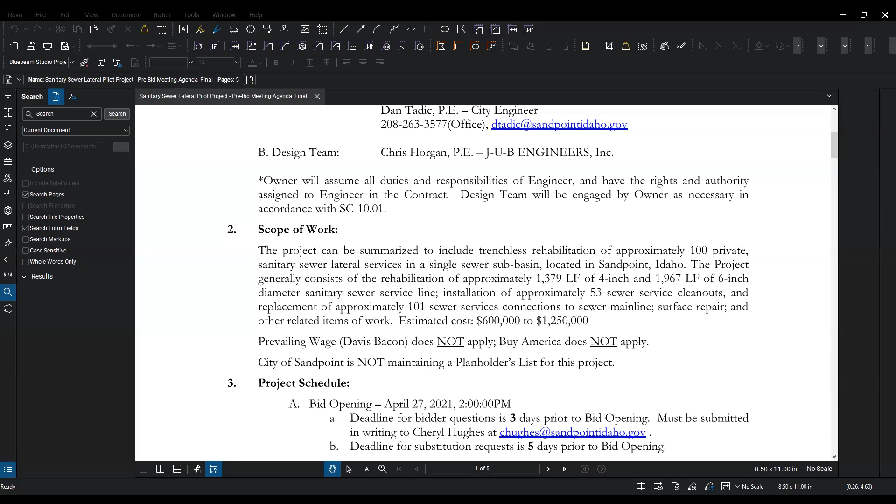Okay, so the project can be summarized to include trenchless rehab of approximately 100 private laterals. And the project is located in Sandpoint, Idaho. Generally, the rehab is approximately 1,379 linear feet of 4-inch and 1,967 linear feet of 6-inch diameter sanitary sewer lateral line, installation of approximately 53 sewer service cleanouts, replacement of approximately 101 sewer service connections to the sewer main line, surface repair, and other items of work.

Estimated cost, $600,000 to $1.25 million. Prevailing wages do not apply. Buy America does not apply. City of Sandpoint is not maintaining a planholders list for this project. Dan, anything to add on scope of work? We'll dive in a little more later. No, I think you covered it well there.

Okay, we'll take a look at schedule. Bid opening is scheduled April 27th, 2 p.m. Deadline for bidder questions is 3 days prior. These must be submitted in writing to Cheryl. Her contact information is listed. Her email is chughes@sandpointidaho.gov. Deadline for substitution requests is 5 days prior to bid opening.

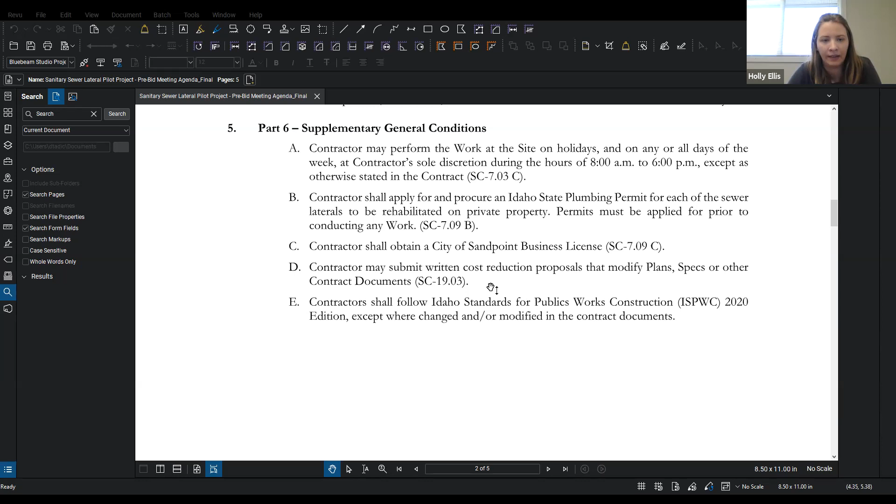This next piece, contractor shall obtain a City of Sandpoint business license. Contractor may submit written cost reduction proposals that modify plans, specifications, or other contract documents. And the last piece to highlight here is contractors shall follow the Idaho Standards for Public Works Construction. It's the ISPWC 2020 edition, except where changed and or modified in the contract. So just a few pieces there to highlight.

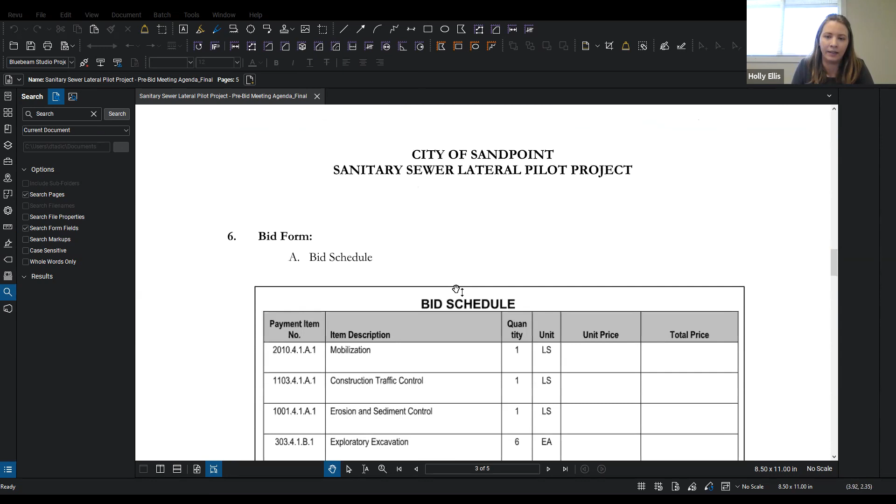This next piece is our bid form, and I'll hand it over to you, Chris, to kind of talk through this portion. Okay, great. Can you hear me okay? Yeah, okay. I see thumbs up.

Perfect. Yeah, so like Holly said, I'll take a quick spin through the bid schedule here, and then we can talk about some of this in a little more detail when we get into part 7 in the next section. So bid schedule, obviously, these are the unit price items that we're planning to use as the basis of payment for this project. So if it's not here, it's incidental to the items listed here. So just keep that in mind looking through this.

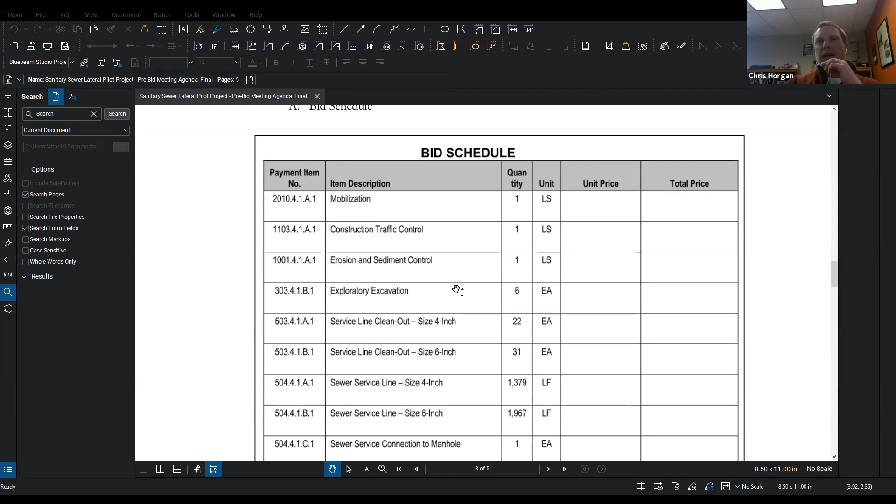The first 3, we've got our standard lump sum items: mobilization, traffic control, sediment control. Exploratory excavation per each. There are very specific instances defined in the contract about when that bid item applies. I'll touch on that here in just a second. But take a look at those so you understand when those happen. Get down into our cleanouts and our service line. As Holly mentioned, that's really the crux of the project here, getting those replaced.

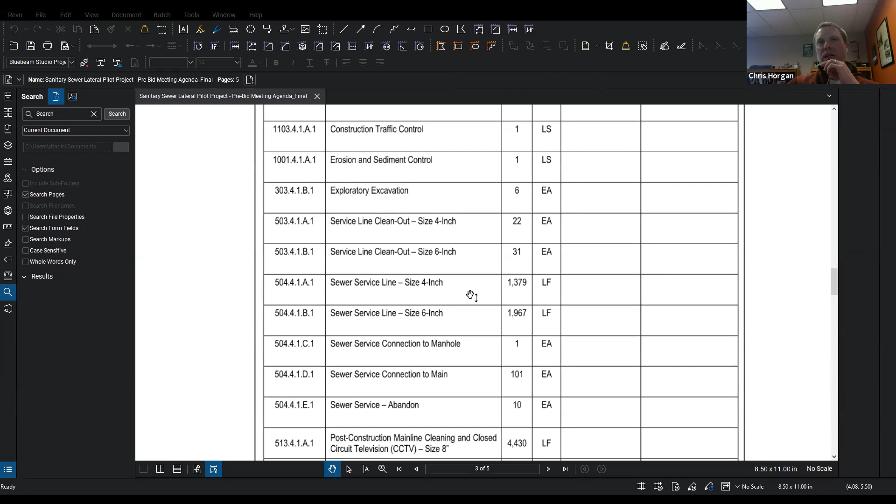Cleanouts are per each. Sewer services are linear foot, and that linear foot is based on a defined length in part 8 of the contract documents. The lateral replacement schedule has a defined length for each service line. And that is the basis of payment. And I guess I can mention it here. We have a few of these laterals that aren't getting a full replacement. There's a couple that just have some small segments that need to be replaced. So the basis of payment for that lateral is just the piece that needs to be replaced.

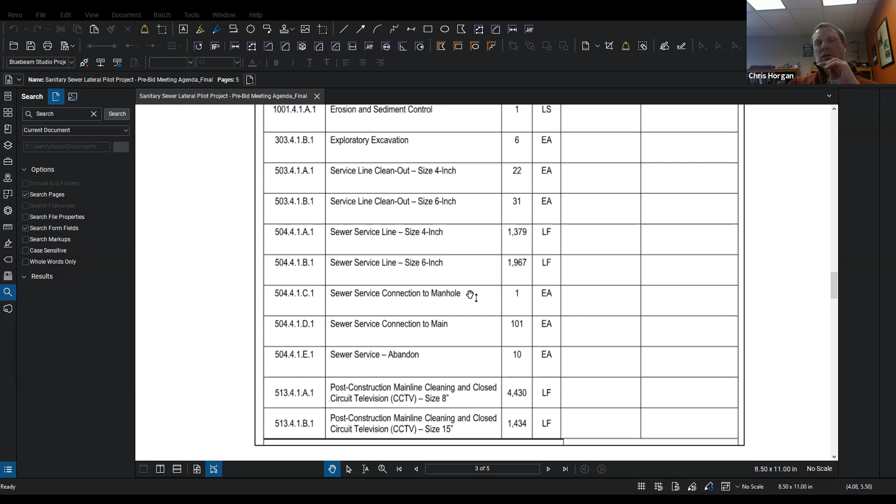So if your selected method of construction requires that you put in a little more on either side to complete that repair, that additional piece is incidental. So again, take a look at part 8 to see what the basis of payment is for each lateral. Connections to manhole and main line, that's where we're getting the lateral connected to the sewer main. Those are per each. We have a few services we're capping and abandoning per each. And then finally, just some post-construction main line cleaning and CCTV.

So again, and I'll mention it as we go through part 7, but some things that are not in that bid schedule: surface repair, excavation, backfill, those sorts of things. Those are all incidental to the items that are in there. All right, jumping into part 7 here. So special provisions, this is where we get into the technical specs. I'll just try and point out a few paragraphs that we think are important. I'm sure everyone's going to read the entire thing, but if you don't, maybe check these paragraphs here.

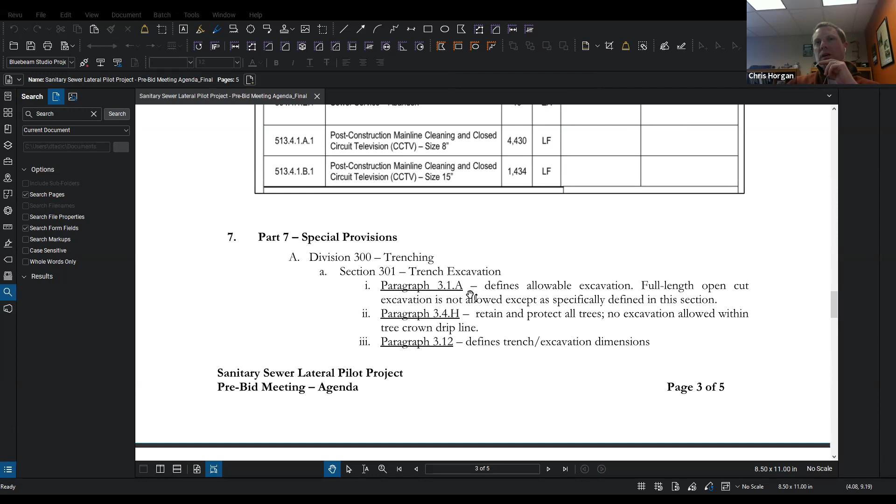So trenching, section 301, I've got a few things called out here, some different paragraphs, 3.1A, 3.4H, and 3.12. Those all define the allowable excavation limits. So in this project, a full-length open cut for the service line replacement is not allowed except as specifically defined in this section.

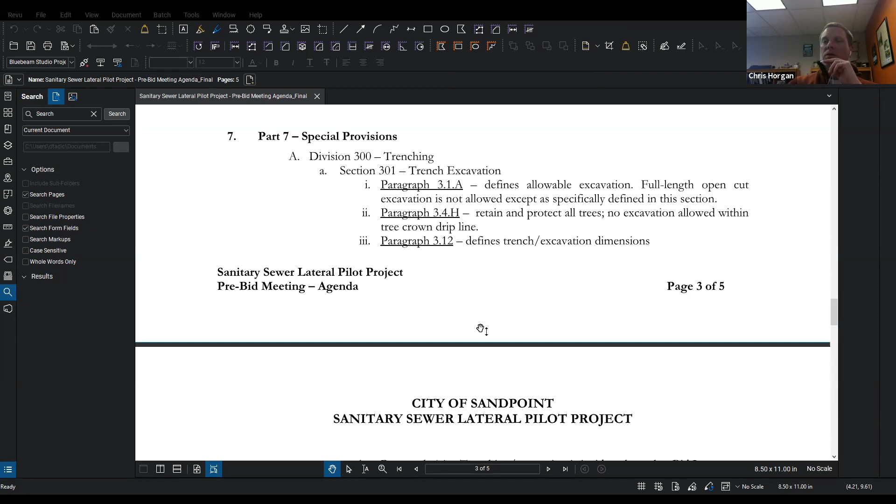So there are some very specific instances where that full-length open cut is okay. Otherwise, we have limited the amount of excavation that is allowed for this project. So please take a look at those instances where it is and is not allowed, and then what the allowable excavation limits are. And then we're trying to retain and protect all the trees here, so we want to eliminate excavation within the drip line.

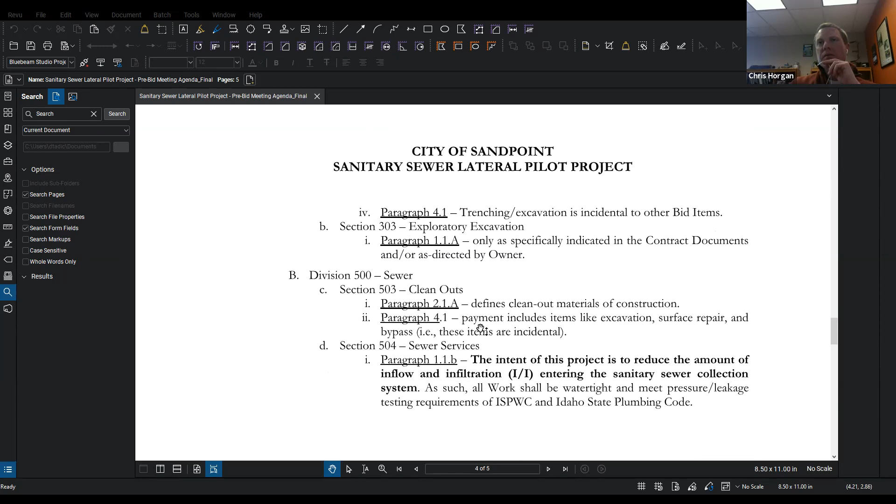As I mentioned above, yeah, you can keep scrolling there, Dan. Paragraph 4.1 talks about payment. Trenching is incidental to those other bid items, whether it be cleanouts or sewer service line. Section 303, exploratory excavation. Again, some very specific instances where that is called for and paid under the contract documents. Otherwise, any sort of exploratory work that you want to do is incidental. So take a look at that paragraph to see when that's allowed and when we expect to pay for it.

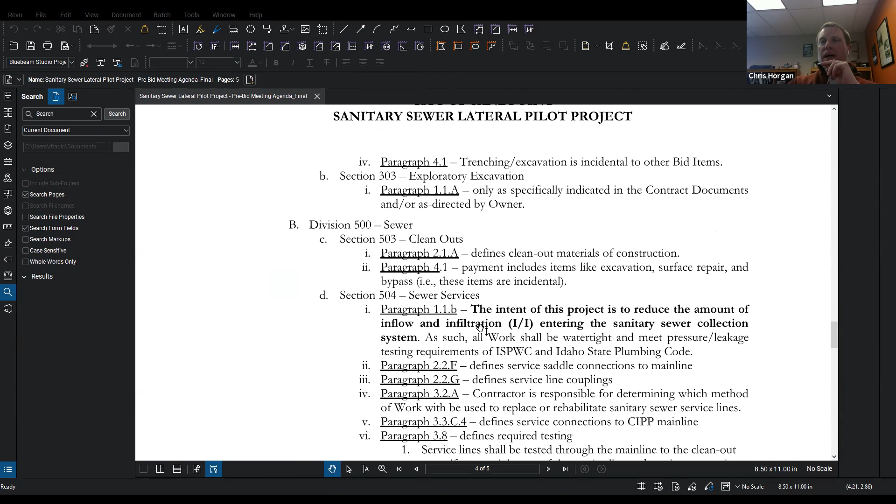So Division 500 sewer. So that's kind of what we're up to here. Obviously, Section 503 cleanouts, paragraph 21A talks about the materials of construction for cleanouts, and then 4.1 talks about payment. Again, things like excavation, surface repair, any sort of bypass, those are all included in the pay item for the cleanout. In other words, they're incidental to that item. We're not making separate payment there.

Section 504, sewer services. I put in bold here, paragraph 1.1. So the intent here, we're replacing these laterals and we are trying to get I&I, inflow and infiltration, out of the city system. So that is key to this project. And so everything we're looking at, we want to make sure that it's watertight and that it meets pressure and leakage testing as defined in ISPWC and Idaho State Plumbing Code. So just keep that in mind. That really is our goal here, is to keep that clean water out of the city system.

Moving along, paragraph 2.2, F and G, those define the couplings that are allowed. So we've got some specific service line to main line connections, and then also some lateral to lateral couplings that we've allowed here, again, to try to meet that intent of being watertight. So please take a look at that list of those allowable fittings. 3.2A, so again, we've limited some of the excavation here, but again, it's up to the contractor to decide which method you'd like to use to do this work. So there are various ways in here, but that's up to the contractor.

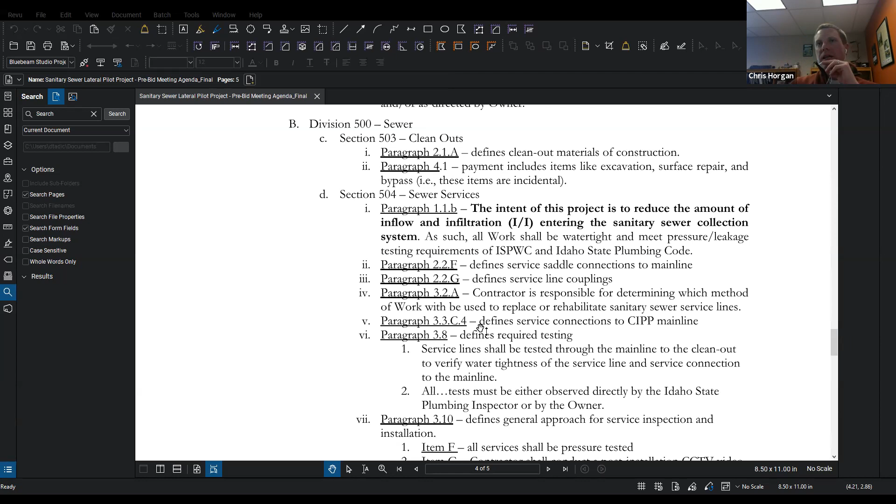3.3C4, connections to the CIPP main line. So many of the main lines in this neighborhood, in this basin, have been rehabilitated with CIPP. So some of these service connections are going to be to that cured in place. We want to make sure we get a nice tight seal on that liner. So this paragraph talks about what that looks like.

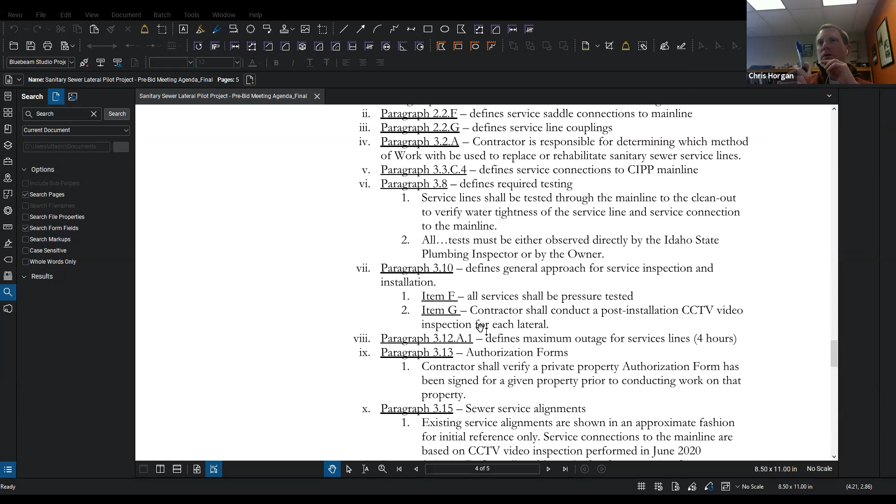Paragraph 3.8 talks about testing. Again, going back to our goal of being watertight here. So we want to test the service lines through the main line to the cleanout to verify water tightness. So again, want to keep the water out. And just a note that through the main line, we also want to make sure we are testing that main to lateral connection. In many instances, that is the weak point in these laterals. And so we want to make sure we get a good seal there. I think Dan mentioned it earlier, but the tests need to either be observed directly by plumbing inspector or owner. And I guess plumbing inspector, that would be specific to the work on private property.

Let's see here, where am I at? 310, general approach for service inspection and installation. So it kind of runs through the steps that we would generally expect folks to follow as you go about replacing these service lines. Point out F and G there, pressure testing, again, trying to be watertight. And then item G, we need a post-installation CCTV video of each lateral. So again, we're getting mainline video, and then we're going to get lateral video as well.

312A1, maximum outage for service lines, 4 hours is the limit there. As Holly and Dan mentioned, this is a residential neighborhood, so we certainly don't want to knock folks out for days at a time, and certainly want to be sensitive to when they're going to be using their water and sewer. 313 authorization form. So any work on private property needs to have an authorization form. The city has copies of those and they can provide them. So no work on private property without that authorization form.

315, sewer service alignments. So we've shown them in part 8 in the drawings, kind of in an approximate fashion. We generally know where they connect to the main line, and we've shown them kind of perpendicular from there. That's just kind of a general location to give you a sense of where they might be. That's based on CCTV inspection from June of 2020. But again, as part of this project, you'll need to verify that alignment as part of the replacement.

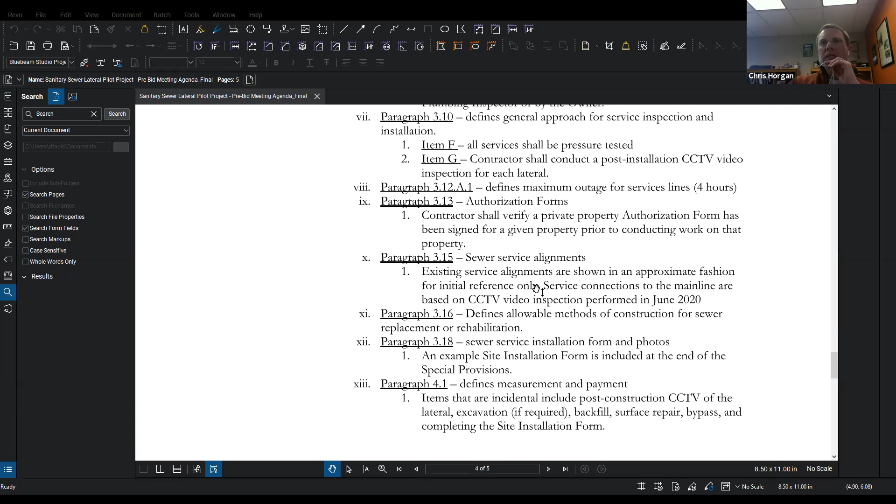316, allowable methods of construction. So again, this just talks about whether it's replacement or rehab, things like pipe bursting or cured in place lining, that sort of thing. Paragraph 318, sewer service installation form. So there's an example of this form at the end of the special provisions. And really this is a way to document the work that is done at each service.

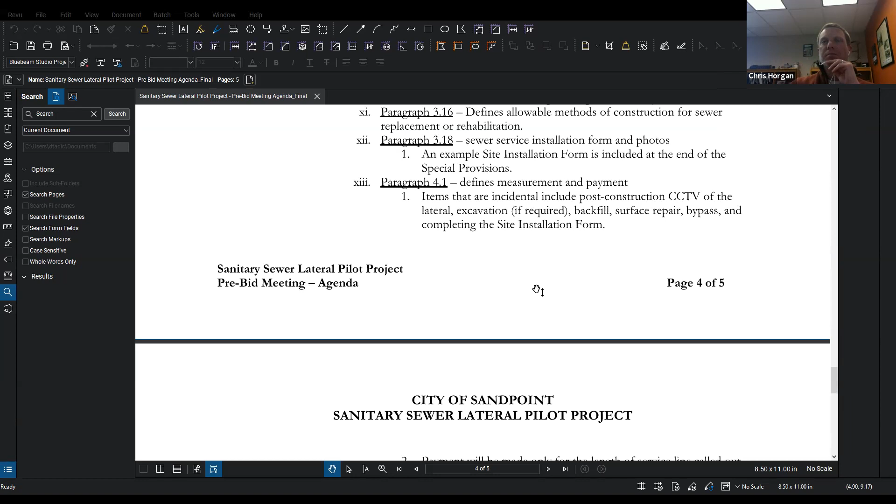So the form has a spot to fill in the address and the footage of the service along the main line, what the service size is, what kind of work was done. Was it pipe burst? Was it rehab with CIPP? That sort of thing. And those are required to be turned in for payment. So if there's no service installation form, there's no payment for a lateral. So we'll get those filled out there.

Let's see, measurement and payment there in section 504. Again, we're paying for cleanouts, we're paying for service lines, everything else incidental there. Things like backfill, surface repair, bypass, all that stuff. And then here, item 2, again, as I mentioned before, look at part 8 that defines the payment limit for a particular service and what the footage is. And then the sum of those footages in part 8 is what makes up the value in the bid schedule.

307, oh, I got that one a little out of order. Sorry about that. Is street cuts and surface repairs, talks about what we expect in terms of pavement. Miscellaneous surface repair, again, that is incidental to the other bid items, whether it's sewer services, cleanouts, whatnot. 509, 510, talk about cured in place pipe and pipe bursting, what we expect there in terms of material and installation. 512 talks about bypass. Here, again, we're working mostly with laterals, but obviously some interaction with the main lines. So needing to plan for that is necessary.

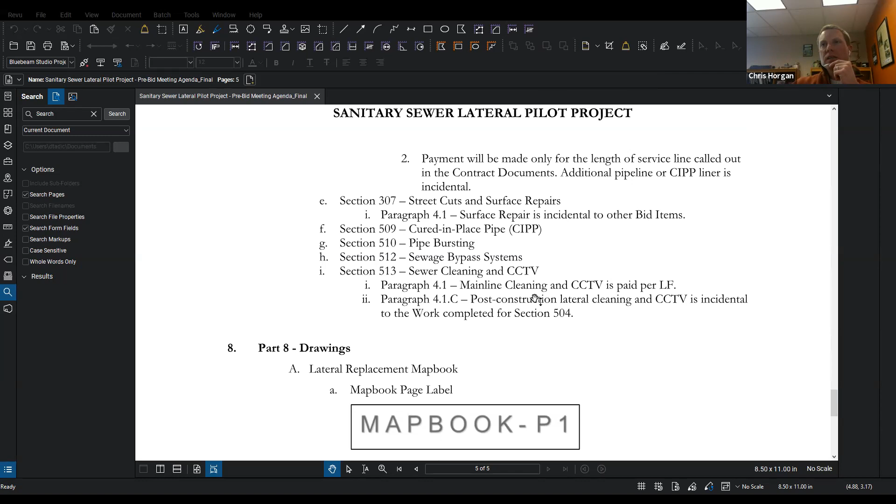And then sewer cleaning and CCTV talks about kind of what we want to see there in terms of that cleaning and CCTV after work is completed. And a note on that CCTV payment: the main line is paid in the bid schedule, but the actual video of the lateral is incidental to the lateral item.

Whew, all right, part 8, drawings. So kind of 3 main components here. You've got the lateral replacement map book. So that gives you a visual sense of where the sewer main lines are, where the laterals are, kind of what the distance is along the main. Each map book has a page number, so P1 through 14 or 15, I don't remember off the top of my head. And then that corresponds with the next section, which is the lateral replacement schedule.

So this replacement schedule is where we define distances along the main line, what size the service is, what kind of work we expect to be done. And again, this is where we define that length that's the basis of payment for each service. And at the top of each of those replacement schedule pages, you'll have a pipe number and a map number. So that map number corresponds to the page on the lateral replacement map book.

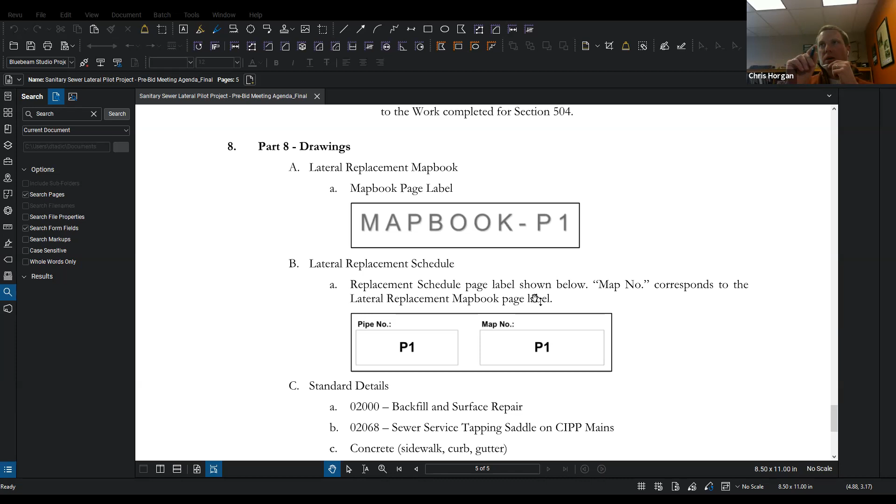So in my example here, I've got map book page P1 and I've got map number P1, which will show pipe P1. So take a look at those. That'll sort of help you keep track of where you're at as you flip back and forth between the 2 sections. And then lastly, just some standard details at the very end here. So backfill and surface repair.

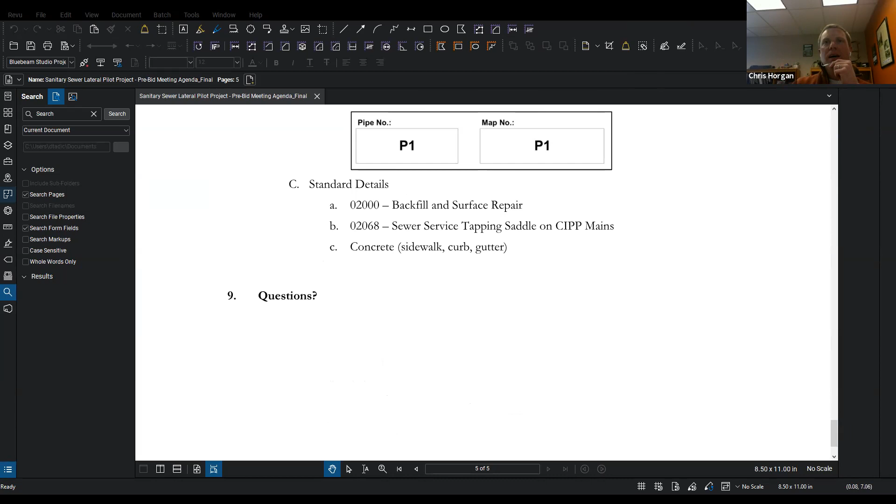We've got a detail for a sewer service tapping saddle on CIPP mains. Again, as I mentioned, we've got some of that CIPP here, so we want to make sure we have a very tight seal on that. And then some city standard details for concrete, sidewalk, curb, gutter, that sort of thing. So there you go, parts 7 and 8, bit of a whirlwind, but I think those are the parts we think are important.

Thanks, Chris. Yeah. At this point, we'll open it up to any questions.

Yes, this bid has 3 different methods of trenchless. How does that work? Will it be all pipe bursting, all CIPP, depending on who has the lowest bid? We expect that it would be up to the contractor. Likely they would have one method. Okay, so you'll pick one method. Well, whatever the bids are and whatever the contractor comes in, whatever their expertise is. Mhm. And whatever the lowest bid is, and then whatever method that contractor chooses, that's what you'll go with.

Chris, is that your understanding? I've never seen a bid written like this, so I'm a little confused. Yeah, so that is the intent. Again, the contractor is responsible to determine which method they want to use here. I suspect that each bidder will have their area of expertise, and that's where they will be leaning on for the majority of these. But there's nothing in here that prevents someone from taking multiple approaches. Okay. So if someone had the ability to do both bursting and lining, this is set up to allow both of those, and they could pick which one they feel is best for each different service.

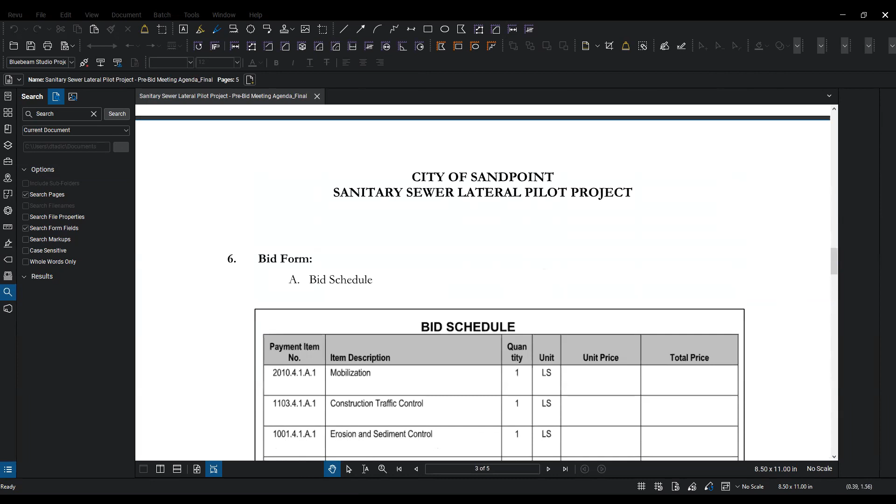Do we have other questions? I have a few, none more important than the first one, if that's okay. Absolutely. So with BLD, we don't have a huge presence out west, so we do not have an Idaho contractor's license. We're not past obtaining one. I would like a little insight, if anybody's got any, as to what kind of timing that would require. Do we have enough time to obtain one of those prior to this bid?

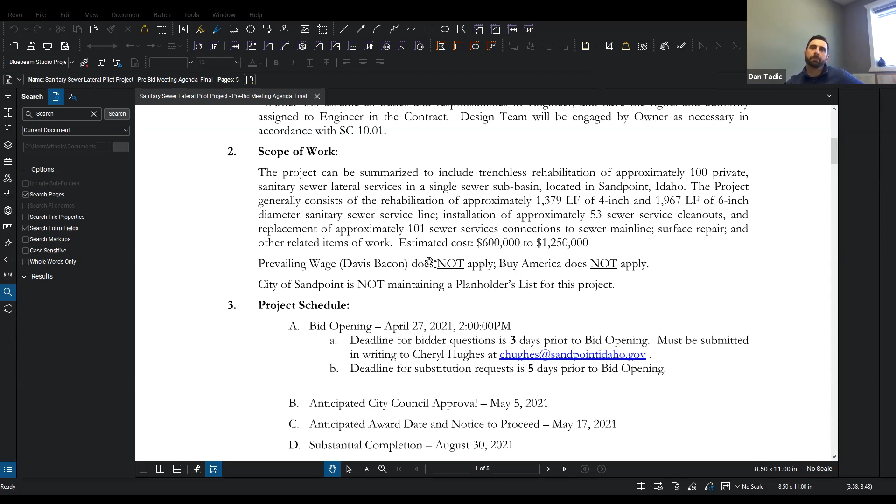I can jump in there, Holly. I unfortunately cannot give a time frame since the city isn't the entity; the state of Idaho issues those. I would encourage you to reach out to the state and get a sense of what that time frame might look like. We have a little less than 2 weeks before bid opening, so obviously time is of the essence there. For sure. Thank you.

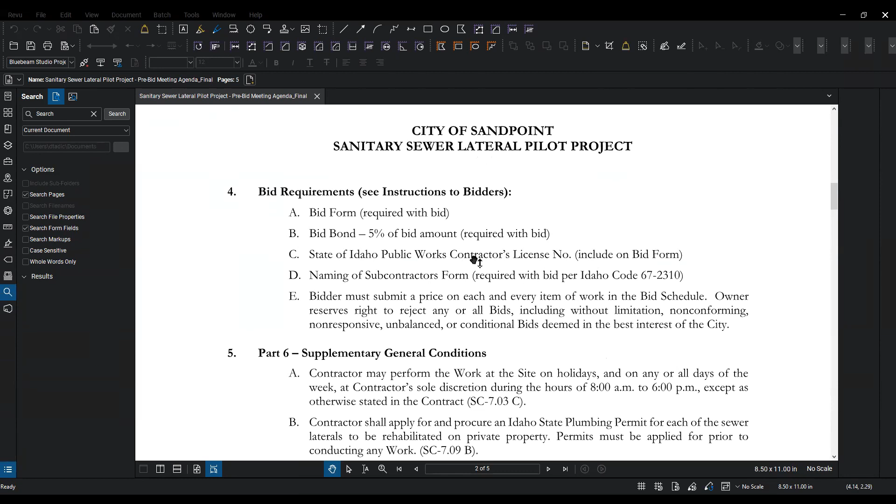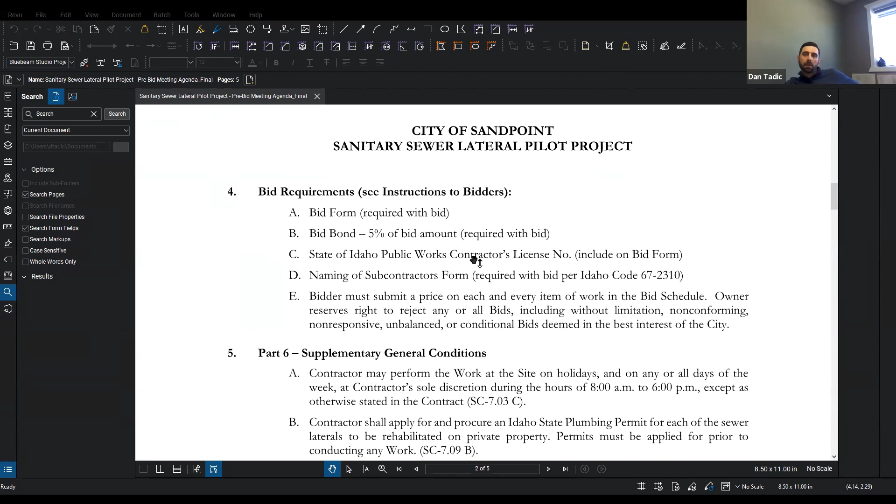Any of these permits that we're required to get, like the private property or the City of Sandpoint business licenses, are there fees associated with either? There's a $50 fee associated with the business license, I believe, and that can be applied for online on the city website. Chris, do we know if the state of Idaho has a fee associated with their plumbing permits? I don't know off the top of my head, Dan. There may be, but they do allow you to batch the requests, so I think that may help mitigate that, but I don't know for sure.

And as far as the authorization forms, the city has acquired the authorization forms for the locations that require work on private property. So no issues associated with that, and obviously no fees associated with that. Okay.

The cleanouts that are listed on this project to be installed, are those necessary, or does the owner want or require those? If we install a lateral liner, I guess you're going to be testing each one of these, so you're going to need a cleanout then. I've just answered my own question, I think. Well, based on the feedback from the state plumbing inspector, any work on private property must have a cleanout. If there's a competent cleanout present already, you may not need to install a new one, but every lateral has to have a cleanout if work is completed on private property. If we're staying within the right of way, we're not asking you to put in a cleanout. Understood. Thank you.

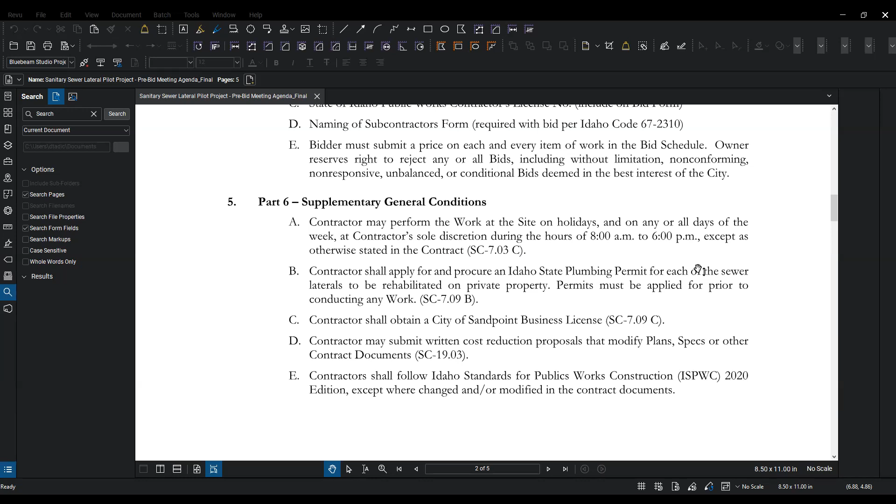Last question. The licensed plumber inspection, is that something that the contractor would have to schedule and pay for? How does that work? Has anybody got any insight there? Chris, I assume that's referring to the state plumbing inspector? Yes, correct. And again, I don't know that off the top of my head. Our plumbing inspections are through the Division of Building Safety. Is that right, Dan? Yes, Division of Building Safety. So those folks could give you a sense of what that looks like.

Just to clarify, the coordination and whatever payment, if any, would be the responsibility of the contractor. What we can't speak to is the actual cost, if any, for those inspections. Gotcha. Understood. Those are all my questions. Thank you.

Thanks. Do we have other questions? Anything in the chat? I haven't looked in a while. It doesn't look like it. I responded to one on there about the agenda, that the agenda would be posted with the video link on our website.